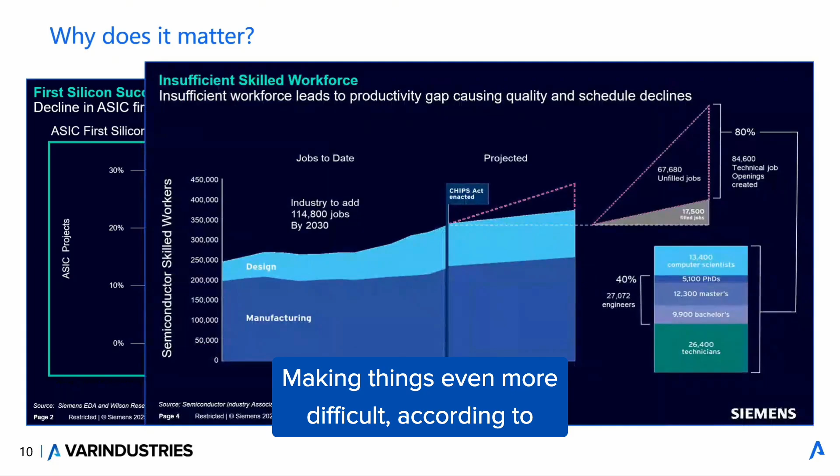75% of chips are behind schedule, meaning we simply don't have enough time to get product out as planned. Making things even more difficult, according to Semiconductor Industry Association, there is a severe talent shortage. It's estimated that 80% of the semiconductor industry's demand for skilled professionals goes unmet. Universities are not producing enough graduates, and the workforce isn't keeping pace.

In short, complexity is rising, time is running short, resources and talent are insufficient. These three factors create a kind of storm for our industry. We don't have enough time and we don't have enough resources.

So let's talk about the trends we see in the market. When I was in school, so I don't want to talk about my age, computers were far less accessible than they are today. Back then, we often shared a single computer among many people.

If we look at the evolution of humanity over the last 100, 150 years, the first big shift was the automation of physical labor, what we call electrification. Later, we moved into the computation era where information and data processing became the driving force. Now we are entering a new phase, cognification. Just as electrification allowed us to delegate physical labor to machines and computation allowed us to delegate information processing, cognification is about delegating thinking itself. This makes a profound change in how we will interact with and shape the world ahead.

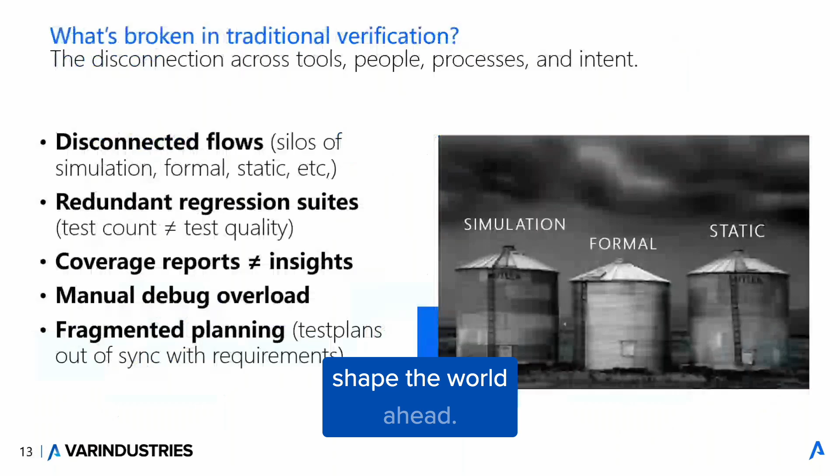So what's not working today? Our traditional approach to verification is no longer sufficient for the trends we face.

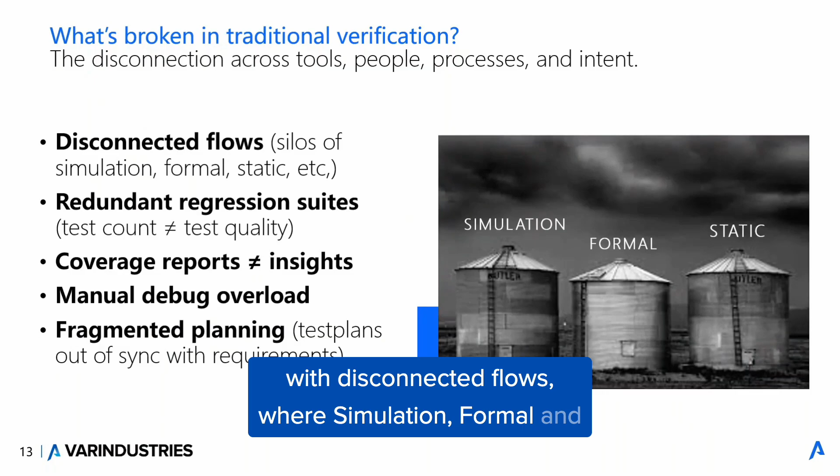Another major challenge is debugging. Surveys show that 40% of the global verification workforce's time is spent debugging, finding, and fixing unexpected issues.

Finally, our planning is fragmented. With global teams, specifications, design intent, and project plans often falling out of sync, leading to misaligned expectations and unpredictable outcomes.

So in short, disconnected processes, over-reliance on manual debugging, and fragmented global planning all create a broken world where traditional verification simply cannot scale to meet today's demand.

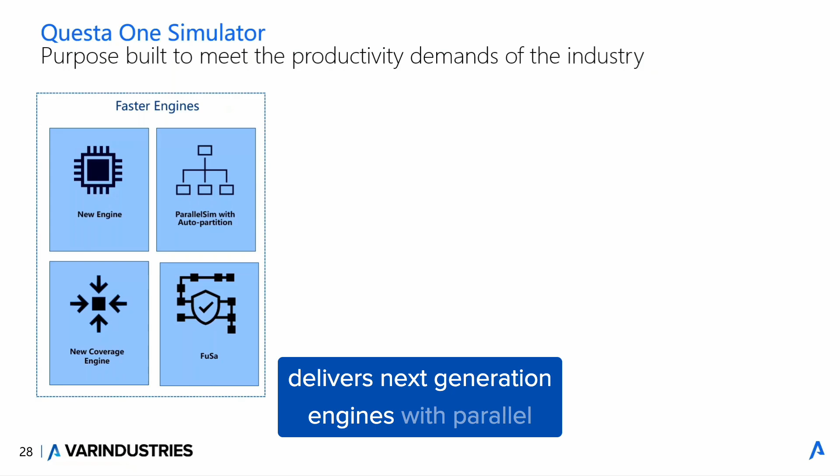Now let's dive deeper into Questa One Sim. Questa One Sim delivers next generation engines with parallel simulation, smart coverage, and built-in safety support. But it's not just about faster runs, it's about faster engineers.

Regarding the new executables for Questa One Sim, whatever the language—Verilog, VHDL, or SystemC—you keep using VLog, VCOM, and SCCOM. For optimization, instead of VOpt we have QOpt, the new optimization executable. For simulation and debug, we keep using QSIM, replacing VSIM.

Let's look at a general use model example. As I mentioned, VCOM remains the same, but VOpt VSIM turns into QOpt QSIM. VLog is okay, but VOpt plus ACC, used for optimization, is now a hard error in Questa One Sim.

Instead, we use QOpt minus debug minus design file. Minus GUI will invoke Questa One Sim in GUI or in live sim mode. The design.bin file will be located and loaded when you use it. And QWave, this dumping is enabled upon a do file or through minus QWave DB.

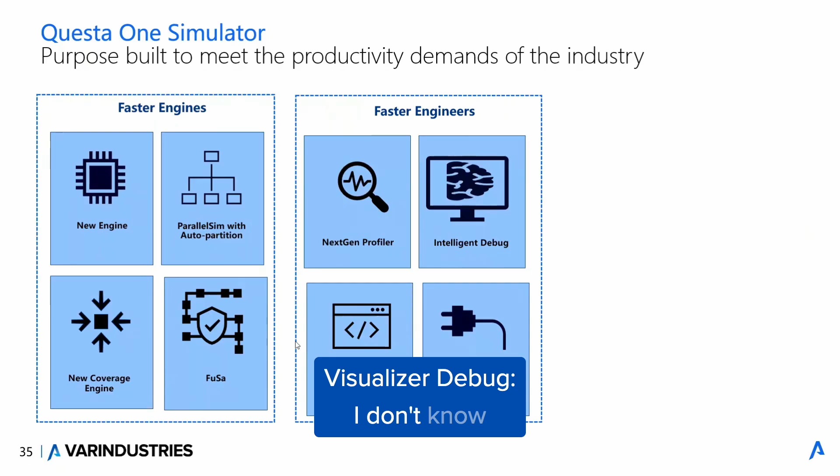Visualizer debug, I don't know if you are familiar with visualizer. It's faster, with a smaller waveform database compared to the classic GUI. We have a rich offline debug feature with continuous new enhancements in this flow, and the generated database is compact.

We have some unique features like multi-test profiler, heat map for Xdebug, interactive coverage analysis, and other nice features like what-if constraint analysis, OmniSearch. I will show you a short demo on it.

We have time-cone X-tracing for people using UVM. We have different windows for class instances, transaction debug, etc.

Visualizer in the Questa tool suite is built on a Qt-based graphical framework. This gives it a modern, cross-platform user interface with responsive windows, docking, and rich visualization features for waveform viewing, debugging, and analysis.

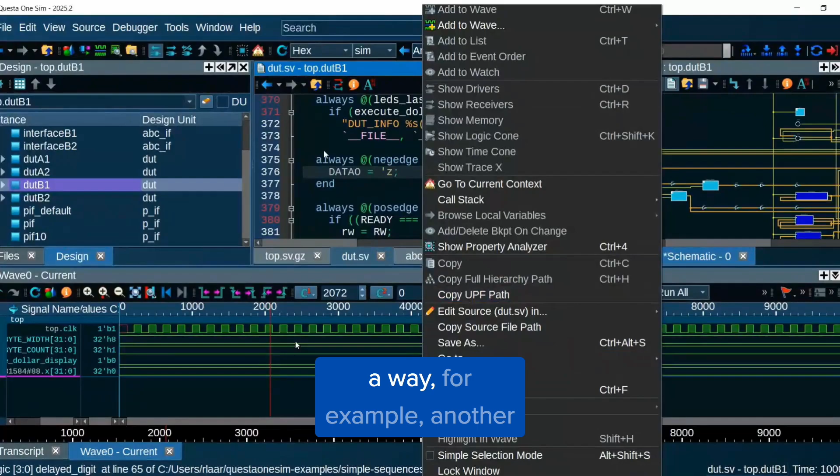When you select any line, right mouse click button, you will have this list of functionalities from the selected line. Let's find another signal or element, for example for the address, right mouse click, show time cone or logic cone.

This opens the logic cone here. You can zoom to fit, double click, and view the associated source code. You can keep double clicking and navigate in this kind of schematic mode.

So now let's go back to the Xdebug feature. How are X values generated in simulation?

Designer assignment: X's often arise from default case statements or race conditions that designers assume will never occur, and therefore don't assign a specific value.

It comes also from init and reset. Uninitialized registers and incomplete reset, or power-aware runs, often introduce X values.

We also have bus and arithmetic issues: multiple drivers, out-of-range access, or divide by zero can all create X's that spread through the design.

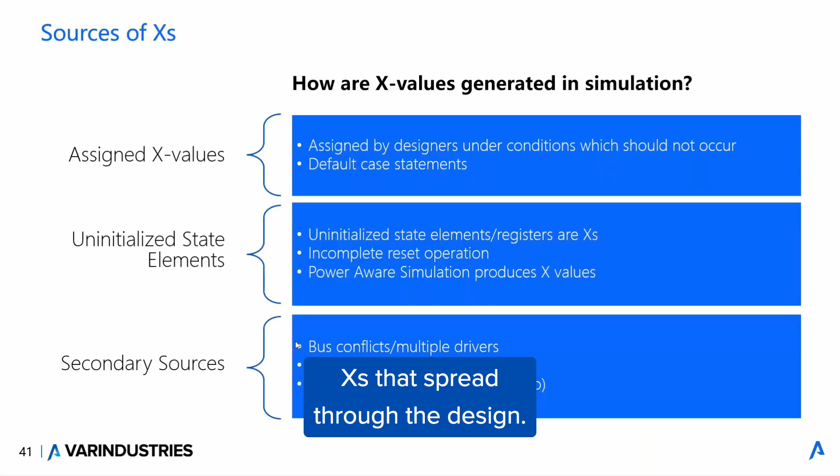We have what we call the dynamic RTL solution, or real behavior. We use Xprop to propagate X and expose real issues during RTL simulation. We detect X optimism, contention, and timing-related X under near silicon conditions.

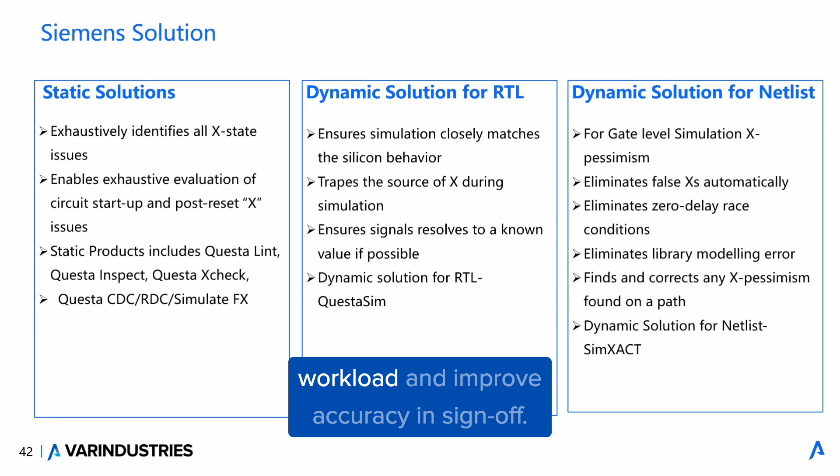And we have a dynamic netlist solution, or accurate GLS. We use SimXACT, an innovative formal analysis and flow automation. It filters false X's in gate-level simulation, then focuses the debug on real X issues, proven to cut debugging workload and improve accuracy in sign-off.

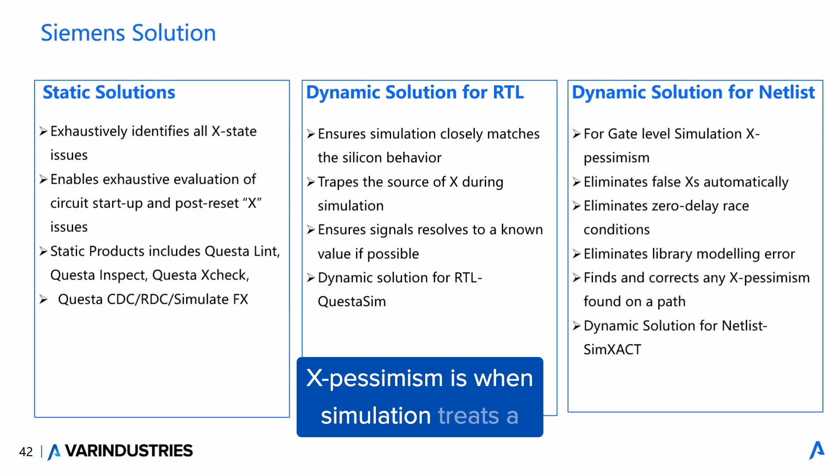So just to recall, X optimism is when simulation incorrectly assumes an unknown value is a known logic value, 0 or 1, potentially hiding bugs. X pessimism is when simulation treats a known value as unknown due to reconvergent logic or uninitialized states, leading to false alarms.

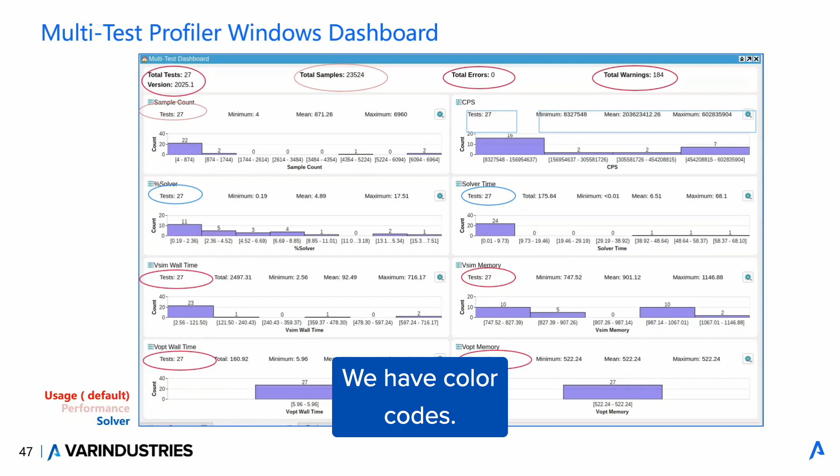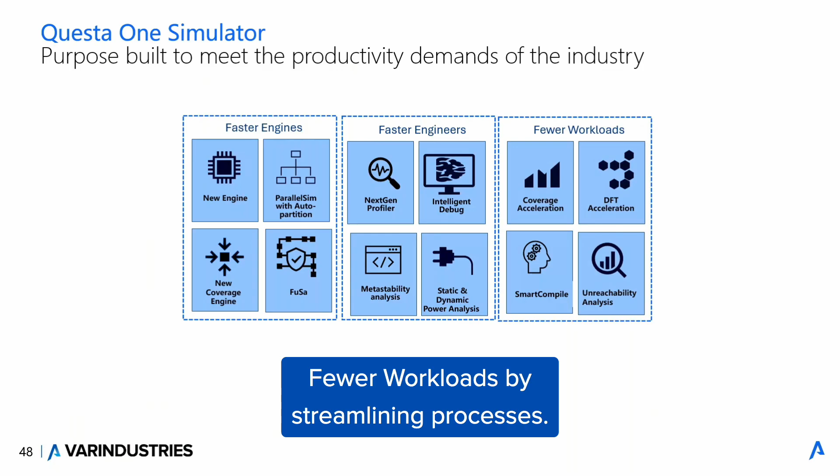Now the focus is shifting to end user productivity: faster engineers through automation and efficiency, faster engines with more powerful, responsive tools, fewer workload by streamlining processes. AI enables smarter verification workflows that boost both engineers and results, not just tool speed.

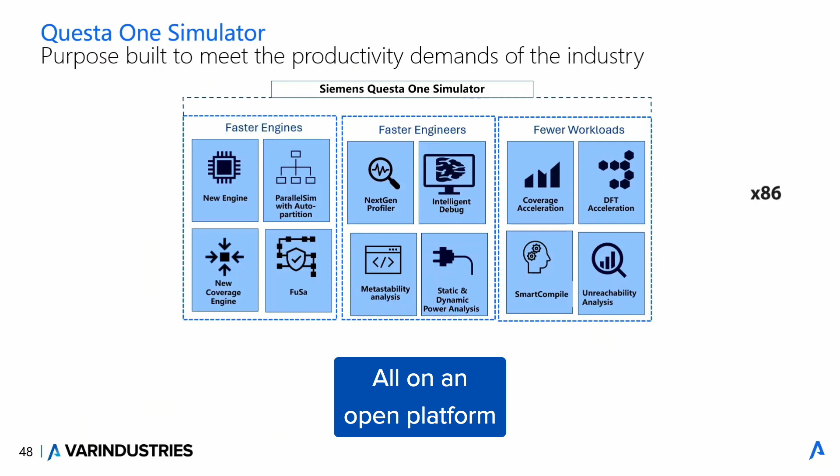All on an open platform that fits in a flow. We support PSS or portable stimulus, VHDL 2019, UVVM, CocoTB framework, etc.

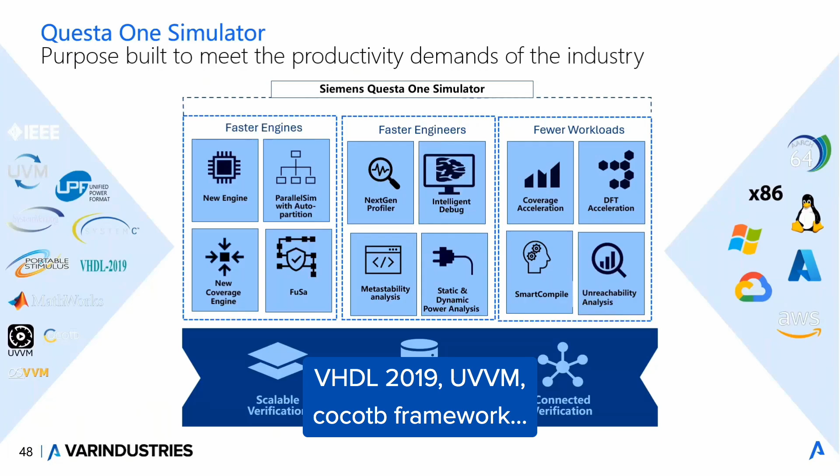So until recently, our lineup included Questa Base, Core, and Prime. Now existing Questa Prime users can take advantage at no extra cost of the powerful new Questa One SIM. This upgrade reflects a major R&D investment and a clear roadmap, delivering even greater value and performance to our customers.

So this is the time for questions. The first question is: can I merge coverage database generated with the old engine and another one from the new engine?

Thank you, this is a good question. The new engine is completely different, so it doesn't make sense to merge previous data coming from the old engine. So no, it doesn't work like this. You need to regenerate new data if you want to do a merge, but you do it in the new engine, of course.